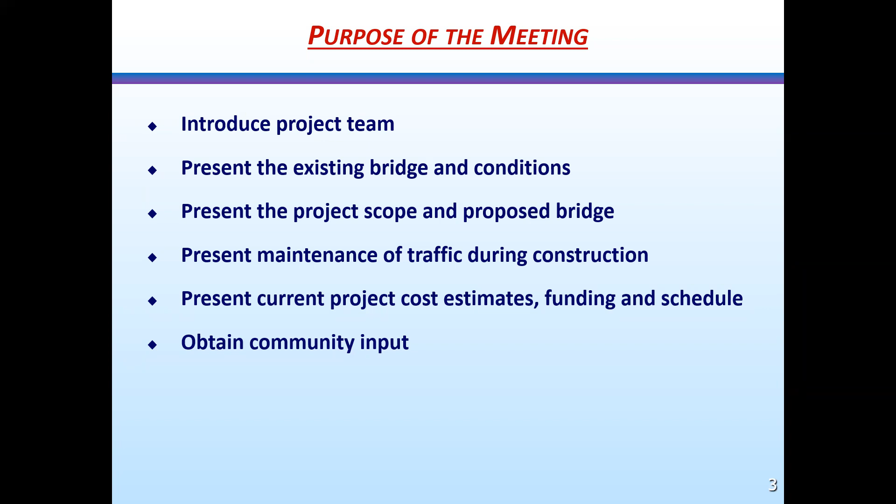First, I would like to go over the purpose of today's meeting: to introduce the project team, then to present the existing bridge and conditions, present the project scope and the proposed bridge, present the maintenance of traffic during construction, and present the current project cost estimates, funding, and schedule. And finally, to obtain your input, which is the most important to the project team, as your input allows the project team to understand the concerns of the community. Your input will be evaluated and considered during the design.

The project team consists of Montgomery County Department of Transportation, MCDOT, Montgomery Planning and Montgomery Parks of Maryland National Capital Park and Planning Commission, MNCPPC, and Johnson, Mirmiran and Thompson Incorporated, JMT, as the prime consultant, and RJM Engineering Incorporated as the sub-consultant.

MCDOT, as the bridge owner, is responsible for the project management, funding acquisition for right-of-way and easement, public outreach for presenting the project to the community and collecting community input, and the coordination with stakeholders and agencies. Montgomery Planning is providing recommendations for master plan implementation, and Montgomery Parks is reviewing parkland impacts and mitigation. The Montgomery County Planning Board will conduct a mandatory referral review meeting and provide their recommendation for the project to the director of MCDOT for consideration.

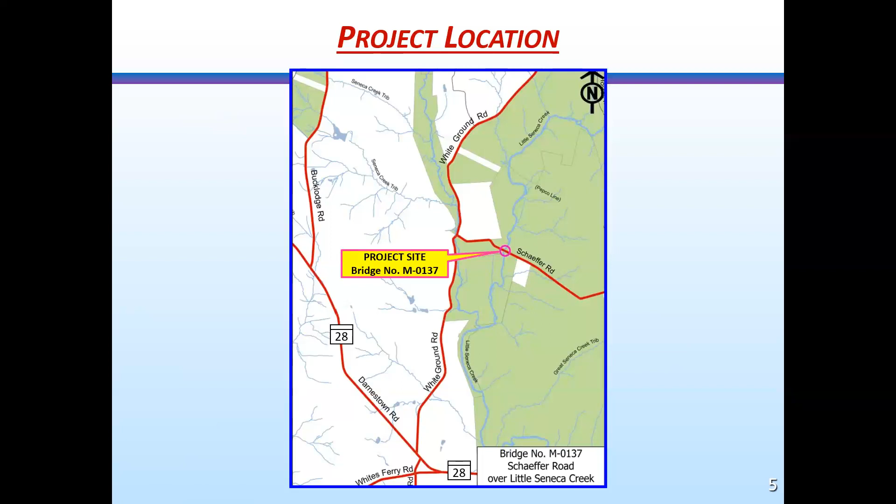The 2023 approved Rustic Roads Functional Master Plan classifies Schaeffer Road from White Ground Road to Burdette Lane as a rustic road. The 2018 approved Montgomery County Bicycle Master Plan does not plan for a bike facility along Schaeffer Road in the vicinity of the bridge.

The bridge is listed in the Maryland Inventory of Historic Properties as number M18-47 and is eligible for the National Register of Historic Places. The road is posted at a 30 miles per hour speed limit.

For the traffic count performed by JMT in 2021 at the bridge, there were approximately 420 vehicles and 65 bicycles per day during weekdays, and approximately 500 vehicles and 170 bicyclists per day during weekends.

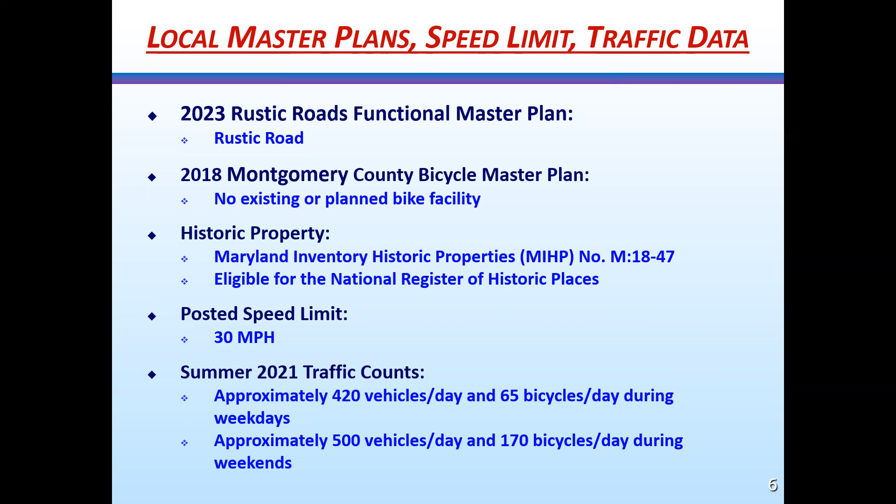Now, we would have a brief review of the existing Schaeffer Road bridge to be replaced. The existing bridge was constructed in 1925 and is a 44-foot, 8-inch long, single-span steel beam concrete deck structure.

This structure carries a 16-foot wide clear roadway for two-way, one-lane traffic with a W-beam railing and a two-strand steel pipe rail concrete post barrier on both sides, for a total out-to-out bridge width of 18 feet 6 inches, and is supported by 2 stone masonry abutments encased in concrete.

The bridge is posted for a weight restriction of 50,000 pounds for single unit truck and 64,000 pounds for combination unit truck.

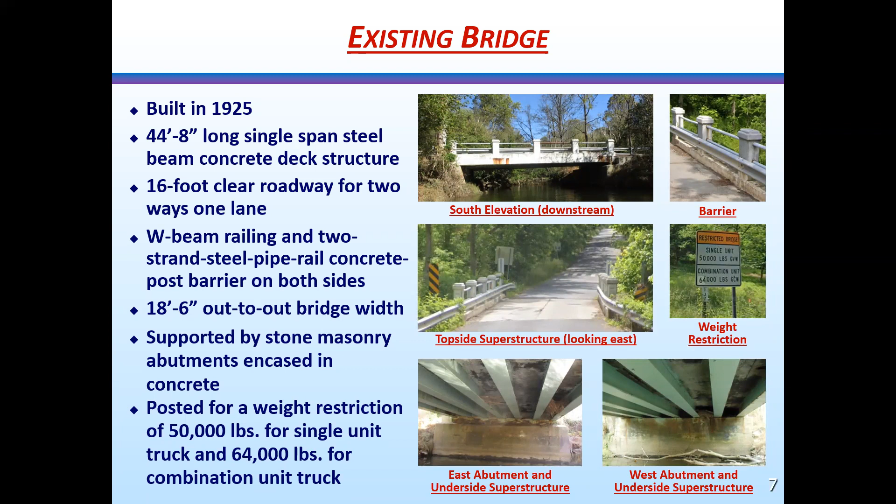The biennial bridge inspection since 2017 revealed the deterioration of the existing bridge. This slide and the following two slides depict the bridge deteriorations.

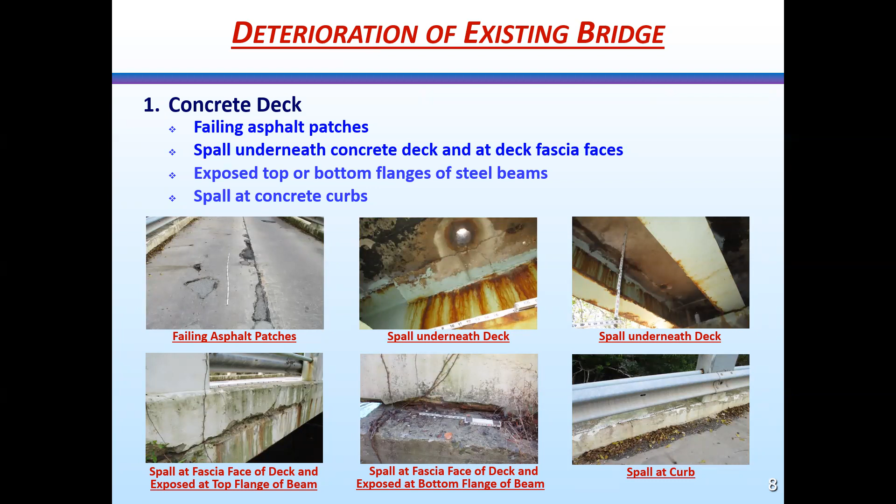1. Concrete deck. The deterioration of the concrete deck includes failing asphalt patches on the lower surfaces, spalls underneath the deck and at the deck fascia faces, exposed flange of steel beam at the portion covered by concrete, and spalls at the concrete curb.

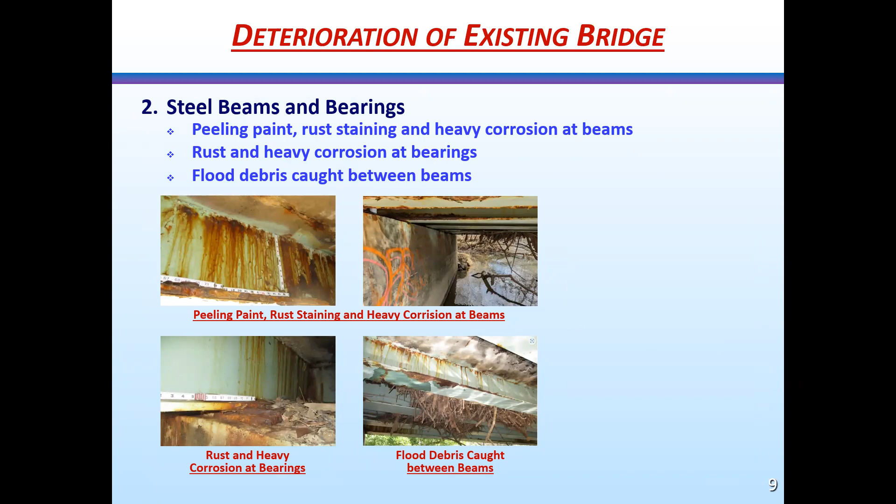2. Steel beam and bearings. The photos in this slide show that peeling paint, rust staining, and heavy corrosion are in evidence at the steel beams and bearings, and flood debris is caught between steel beams.

3. Masonry abutment encased in concrete. The deterioration of the abutments includes holes, cracks, spalls, and heavy efflorescence on concrete back walls and concrete encasement. The mere fact that the masonry abutments have been encased in concrete likely means failure, such as stones coming loose or scouring of the footings, while diminishing the structural capability.

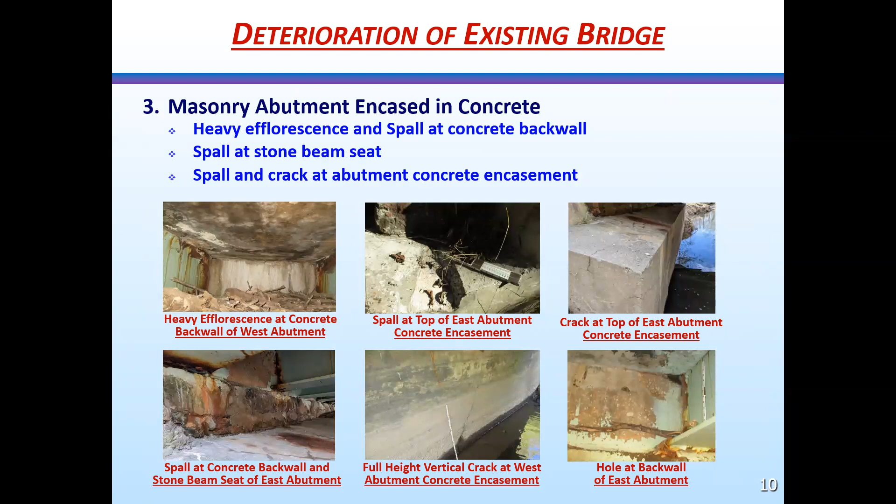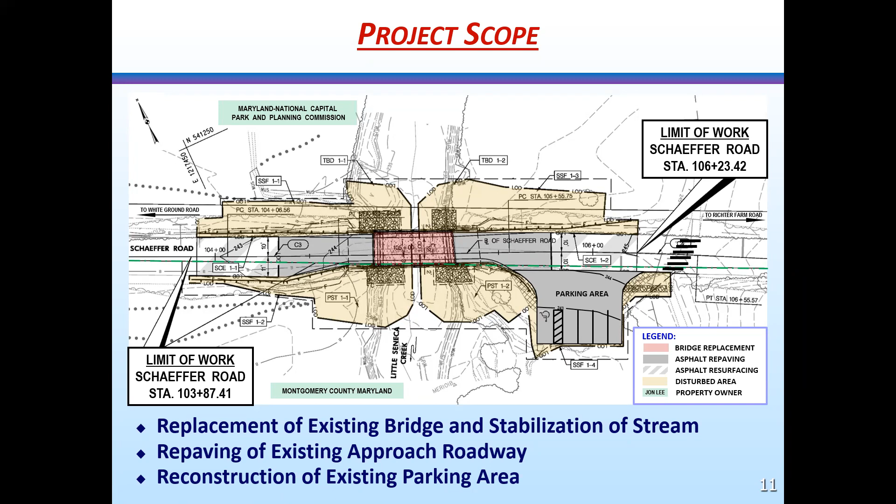The yellow area indicates the adjacent site to be disturbed by the construction of the project. A total of approximately 16,000 square feet will be impacted by the construction.

The next two slides inform you of the configuration of the proposed bridge. The proposed bridge will be approximately 42 feet, 6 inches long, a single span precast pre-stressed concrete solid slab beam structure with 5-inch minimum concrete overlay.

Carrying a 16-foot clear roadway for two-way one-lane traffic and a 2-foot 6-inch wide by 3-foot 6-inch high modified Caltrans type 85 concrete barrier on both sides, for a total out-to-out bridge width of 21 feet.

This structure will be supported by 2 concrete abutments with concrete wing walls, concrete footing, and 30-inch diameter drill shaft concrete foundation. Riprap slope protection will be installed over the adjacent sloped ground surrounding the abutments and the wing wall.

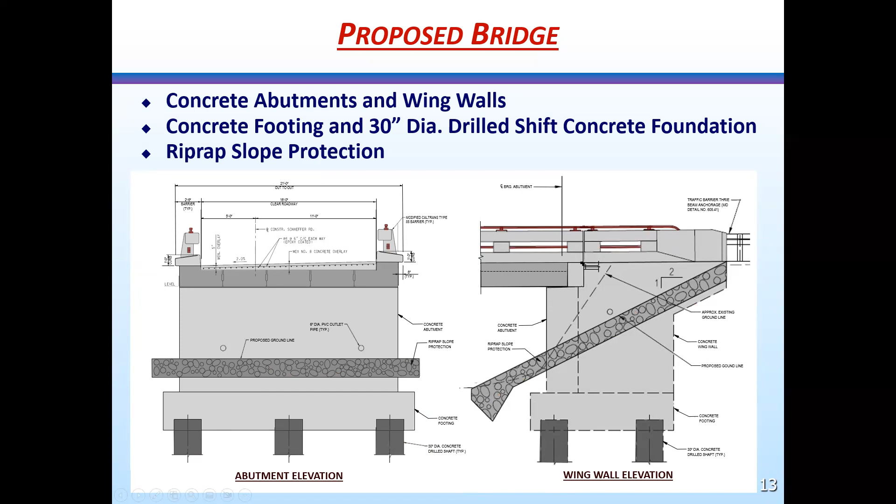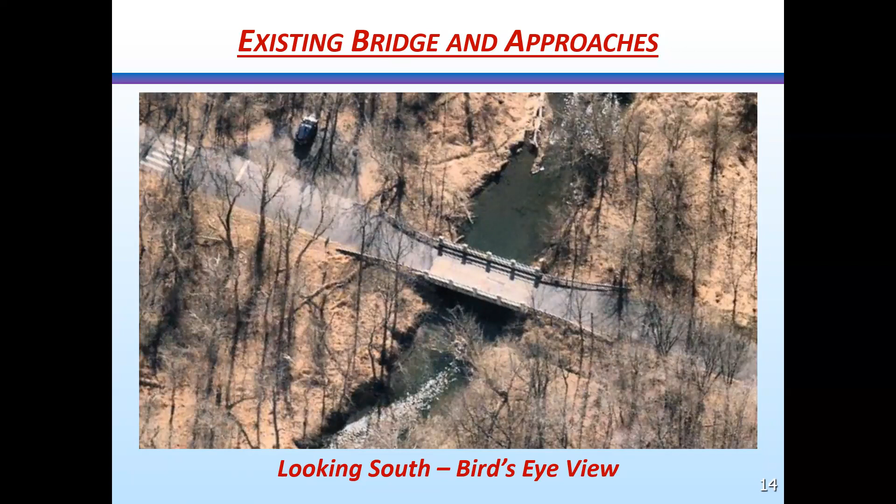To minimize the disruption to the traveling public and the local community and reduce the impacts to natural resources, the bridge will be closed to traffic within the school summer break during construction. MCDOT has coordinated with fire and rescue services, police departments, transit services, and the public school bus operations for the bridge closure. The traffic will detour using a 5.6-mile detour route from the intersection of Schaeffer Road and White Ground Road

through White Ground Road, Clopper Road, Maryland 117, and Richter Farm Road to the intersection of Richter Farm Road and Schaeffer Road.

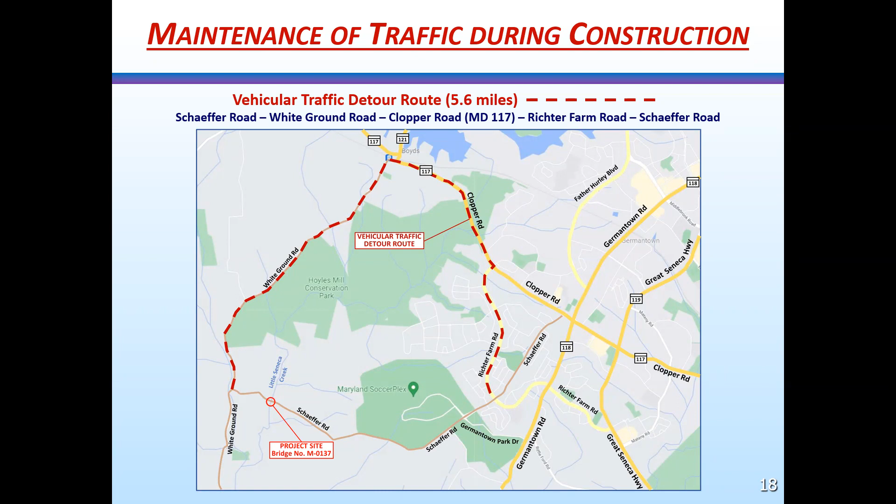The project is currently at the preliminary design stage, which is 30% level of completion. This project is a federal aid bridge project that federal funds cover up to 80% of the project cost, and Montgomery County shares the remaining project cost.

Currently, $800,000 is estimated for engineering cost, which has been funded. A preliminary estimate of $2.44 million for construction and construction management cost has not been funded yet. A standalone capital improvement project will be created to fund the construction and construction management.

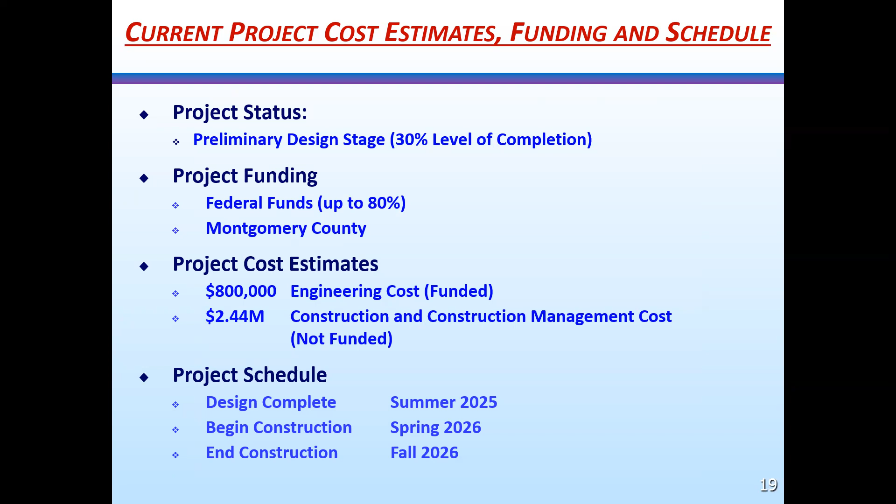According to the current project schedule, the design is expected to be completed in the summer of 2025, and construction is expected to start in the spring of 2026 and end in the fall of 2026. Please note that the estimated project cost and schedule are subject to change as the design progresses until it is complete.

The next step of the project is to proceed with the final design based on comments we receive from the listed permitting agencies and feedback from the community. The permitting agencies include Maryland Department of Transportation, State Highway Administration, Maryland Department of Environment, and the U.S. Army Corps of Engineers, Maryland National Capital Park and Planning Commission, Montgomery County Department of Permitting Services, and the Montgomery County Department of Transportation.

The project team welcomes any comments you might give tonight. After tonight, you will have one month, through October 6th, to provide the project team with your comments. You may send your comments using the online comment form at the provided website address, or by email to me at greghuang@montgomerycountymd.gov.

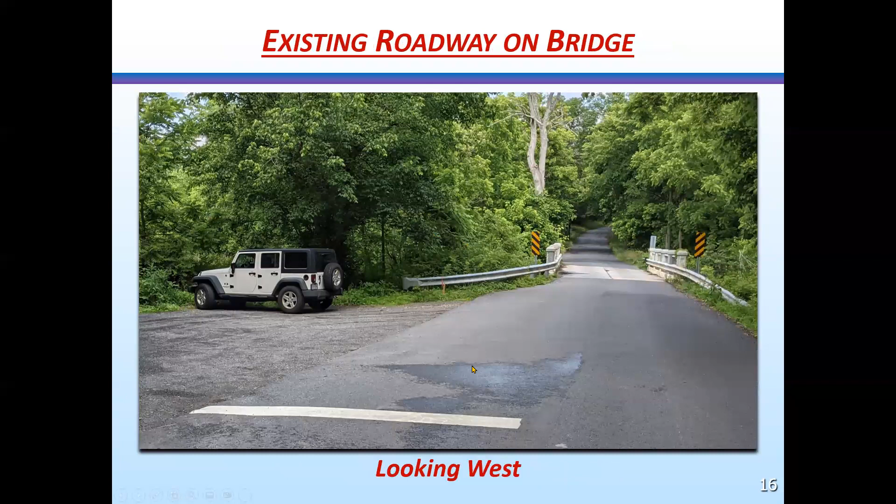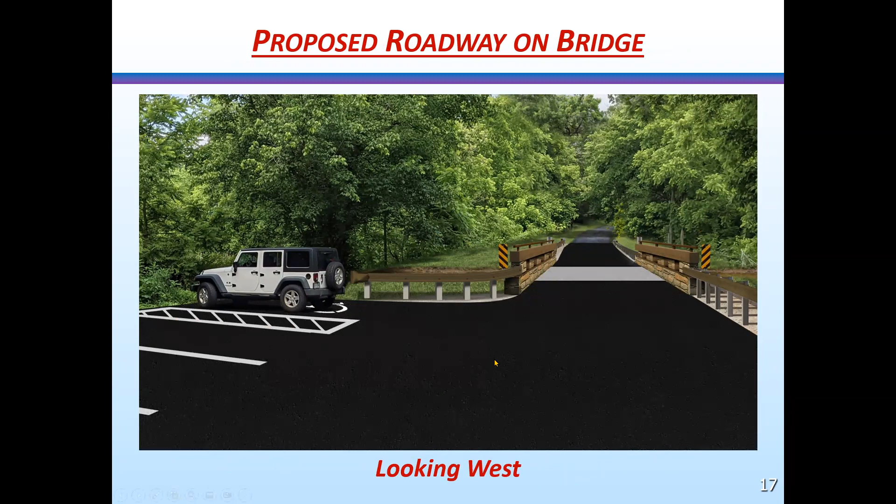All right, Greg, the Rustic Road Committee would like to look again at the parapet. Can you flip back to that? So we have a Rustic Road Advisory Committee representative with us today. Okay, great, is this what she would like to look at? They just put in the chat that they wanted to look at the parapet. This is the parapet, I can bring the cross section up. This is the parapet, the typical section of the parapet. This is the elevation view of the parapet from outside of the bridge.

Laura Van Etten with the Rustic Road Committee would like to know if there are other types of railings to choose from. At the beginning of the project, we presented several different options to the Rustic Road Advisory Committee, and this is the type of barrier that was recommended back in 2021.

That's why we adopted this type of barrier for the proposed bridge, unless the Rustic Road Advisory Committee can come up with something else that can be accepted by the State Highway Administration and also meet the MASH test requirement, which is the test for a parapet. Otherwise, we have to continue to proceed with the design using this type of barrier. But we're open to and welcome the Rustic Road Advisory Committee to provide any recommendation for any other type of bridge barrier for our consideration.